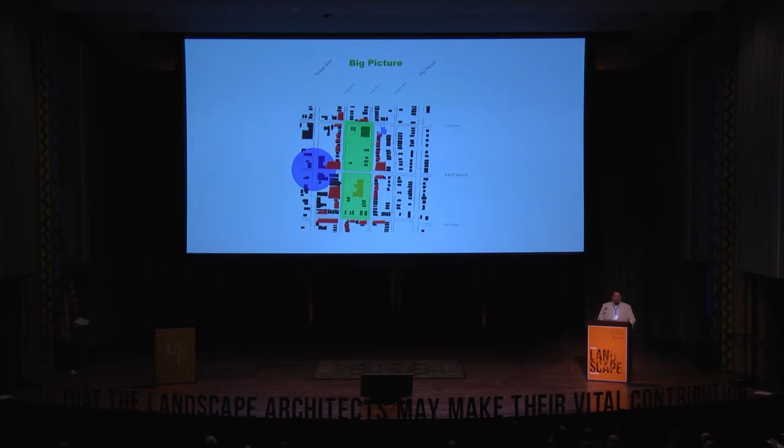Instead of looking at blight and vacant lots as a constraint, we looked at that as the opportunity with this idea of urban acupuncture. If you look into many of the urban cores, vacant lots, demoed houses, blight is an overwhelming obstacle. But when you concentrate that around a 2-block radius of your first investment, it's something that's attainable. 40 lots, 40 houses, catalytic, resource-rich environment needs to be brought life back into it. That was our approach. And then we received a letter of invitation from the neighborhood to fulfill that idea.

It's interesting when you get the community involved and they are the design team. It's interesting what you hear through that process. It's interesting how it engages that process. And most importantly, it's interesting how it transforms the process.

12 months later, the Bancroft School was built. We leveraged 22 different funding mechanisms to cover $15.1 million of a project that had no debt after the project was done, completely led by a landscape architect group looking through the lens of urban acupuncture. Since this project has completed, we've seen a 28% reduction in crime in the neighborhood, property values increase by 40%, and they're asking us to replicate this model all over the city.

Every city in America has abandoned schools. Every city in America uses those same funding mechanisms.

And both of those processes allowed me to learn how to listen. I was a green cheerleader before those experiences. I didn't understand how to truly listen, and it allowed me to learn and transform and change the world through landscape architecture, and that's what I think today is. From my standpoint, today is not a declaration of concern, it's a declaration of opportunity. It's a declaration of opportunity that in any ecosystem across the country, we can elbow into the table and transform.

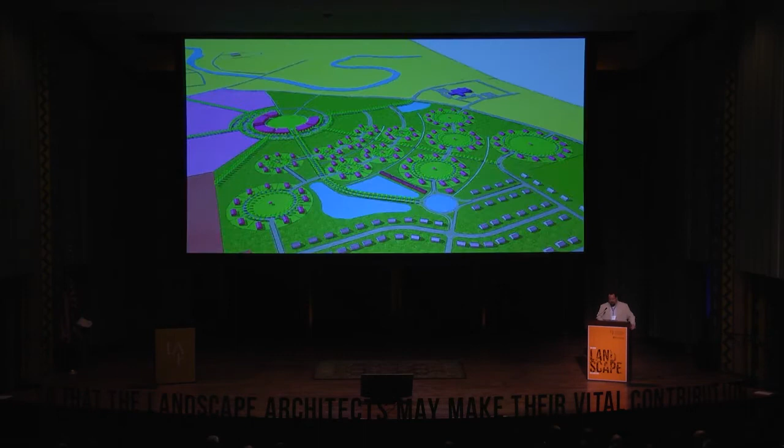We created a design that was based on the culture and the sacred cultural geometries of the Fort Peck Indian Reservation, defined new housing typologies. We just finished the 20th house, LEED Platinum Net Zero, rent-to-own home that leveraged $6 million of funding incentives, of Tiger dollars, of federal tax credit dollars, of housing incentives, and economic development around jobs.

All of these systems have historically been independently thought of, and they can independently be chicken broth, but the analogy coming from New Orleans is that I'd like to make them chicken gumbo. We need to bring them together to elevate the opportunity. We need to leverage those resources into that ingredient-rich soup that we all so much love.

We need to create green infrastructure ninjas across the country. There is $300 billion in current committed projects in over 160 cities across America under consent decree that can be designed by civil engineers and water resource engineers as big gray tunnels, or they can start to look at regenerative infrastructure processes through urban acupuncture and transform the urban core.

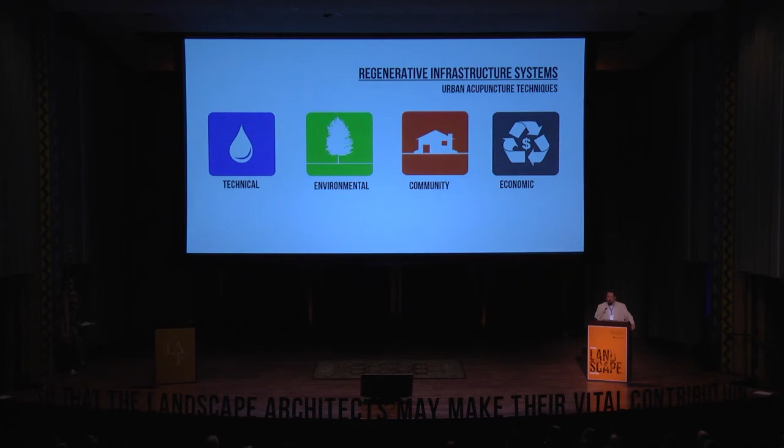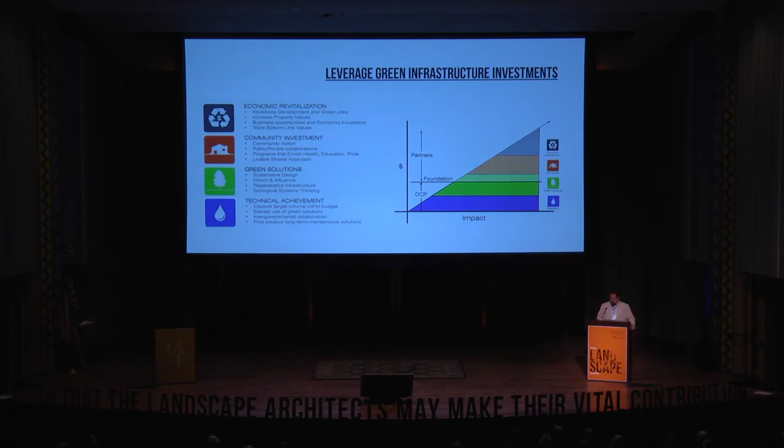I understand that it needs to technically work, but it can also have environmental benefits. It can transform communities and create jobs and economic development systems in one overlay. We need to understand who the right players are, who the right decision makers are, and lobby to transform that process so we can have a seat at the table. And we're seeing that it's a very effective tool as we work in both Kansas City and Pittsburgh, Pennsylvania.

The gray solution is not working. We need to depave these streets and create road diets. We need to link community assets through green corridors and connectors. And we need to use our natural systems and resources to further define ponds and parks into an integrated, connected system.

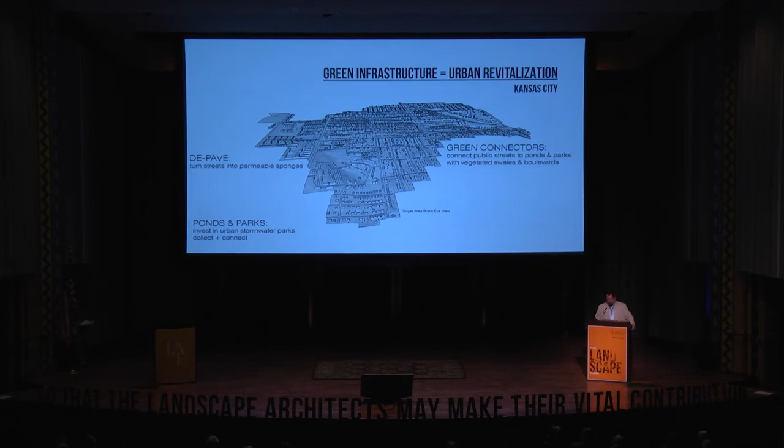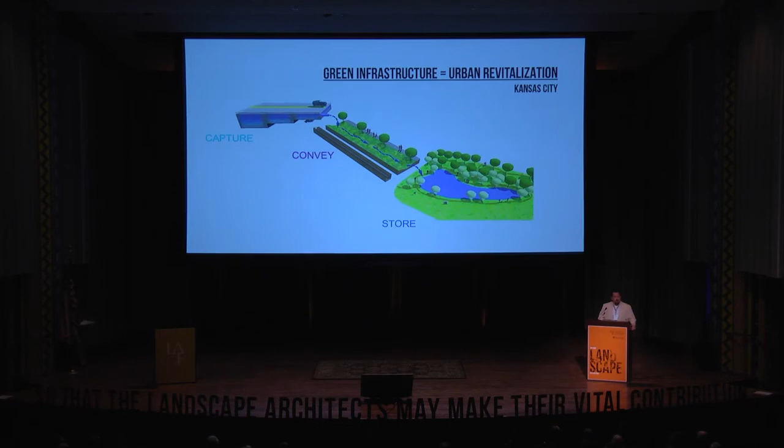Our paradigm is rethinking the street. How does the street become a sponge? For thousands of years, we've been taught and trained: collect, convey, and discharge. That's the opposite of what we need to be thinking about as landscape architects. We need to capture it, convey it through bioswales and public realms, complete streets, and store that in amenities.

That same graphic can create this. That leveraged an $80 million project and is currently under construction in Kansas City, linking these series of 3 major green infrastructure sites to also major BRT, bus rapid transit, and public transportation connections and complete streets through mixed-use downtown cores.

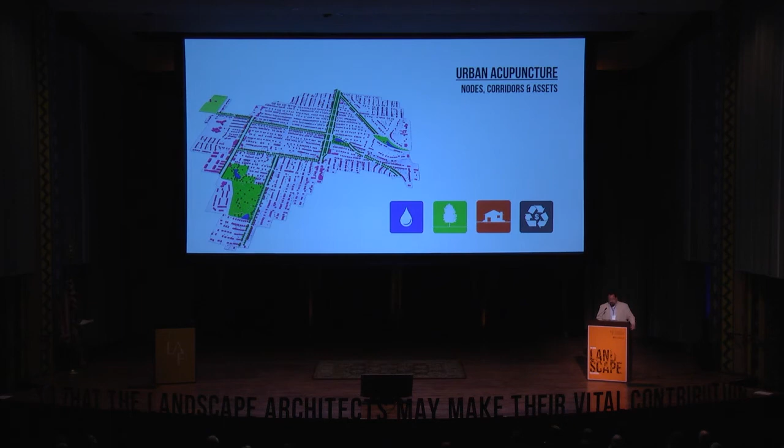Green infrastructure is a catalyst for urban revitalization.

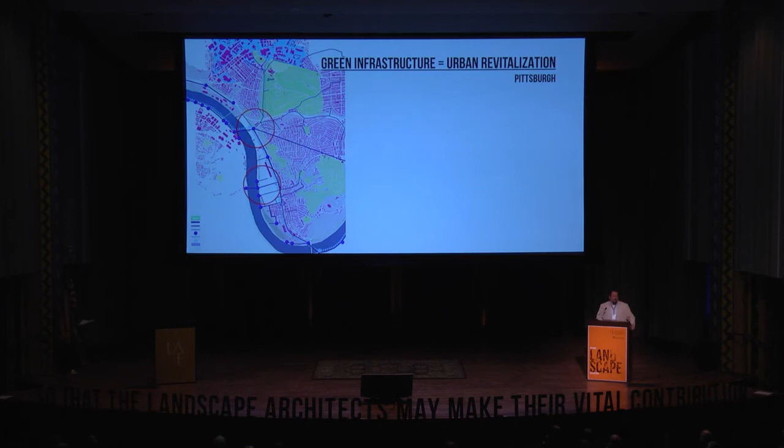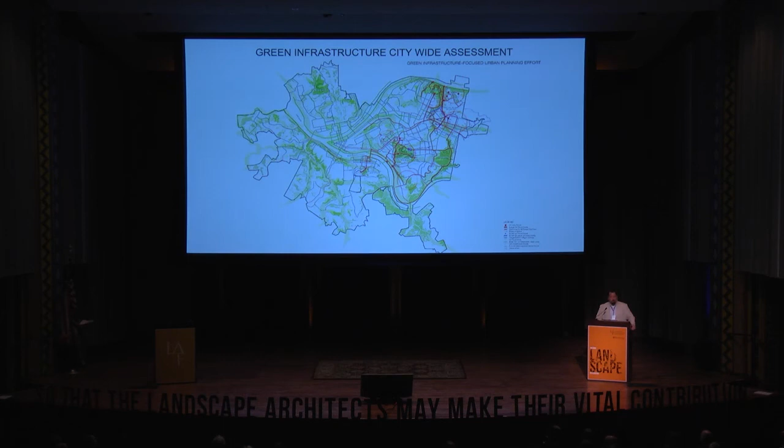So we were asked to create a green infrastructure citywide assessment in a variety of strategic watersheds in the city of Pittsburgh, Pennsylvania. They're currently finalizing their consent decree as we speak.

So we first said this is about an urban design exercise. We need to understand how to link the nodes, corridors, and assets within this community and overlay the technical understanding of high-yield stormwater watersheds. And so in this watershed in particular, it's about linking transportation corridors. It's around linking a VA campus and workforce development opportunities through a series of complete streets approaches of bioswales, constructed wetlands, and rain gardens.

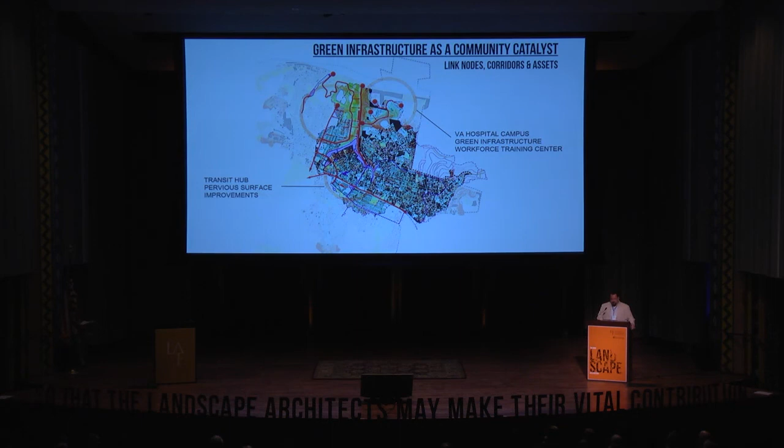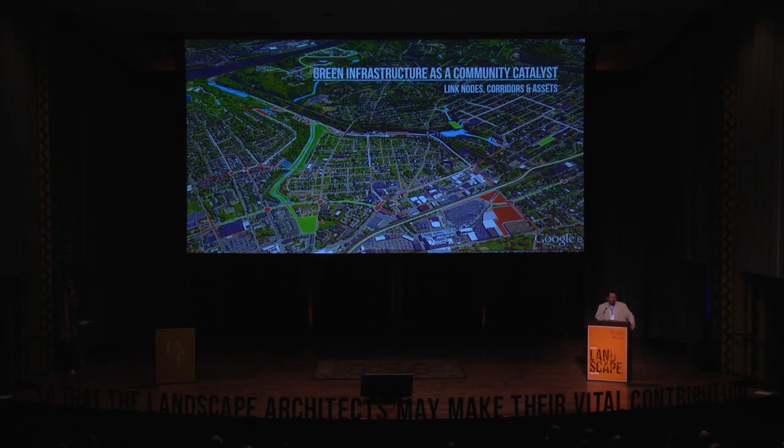That system then provides strategic focus. That system then allows the housing authority to overlay land bank lots, to identify when strategic investments can reinforce that and leverage those resources together. That system can identify community assets, healthy corridors, housing infill and renovation, and transportation lines to address all of the concerns that many of us deal with on a daily basis. But understanding how these all come together need to be the role of the landscape architect.

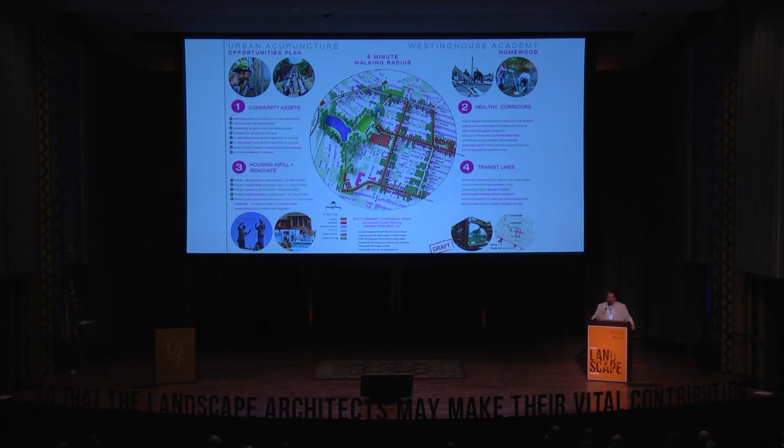If we truly want to overcome blight and disinvestment in marginalized communities, we need to be designing regenerative infrastructure systems. We need to develop a holistic approach that is strategic. We need to lobby for change at the decision-making table. We need to facilitate and prioritize community-based planning initiatives so that they don't stay a document on a shelf, that they become incorporated directly into the planning. And we need to define innovative funding mechanisms to leverage these resources into gumbo.

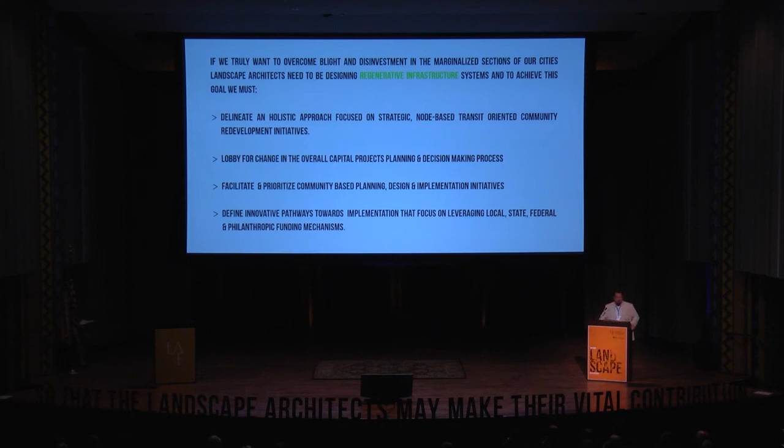And so, to the room of green infrastructure ninjas in a city that might be competing with Kansas City in terms of green infrastructure, please develop holistic green infrastructure urban planning efforts focused on identifying opportunities that support regenerative and resilient strategies for catalytic redevelopment. And start that process before the sun goes down today. Thank you.